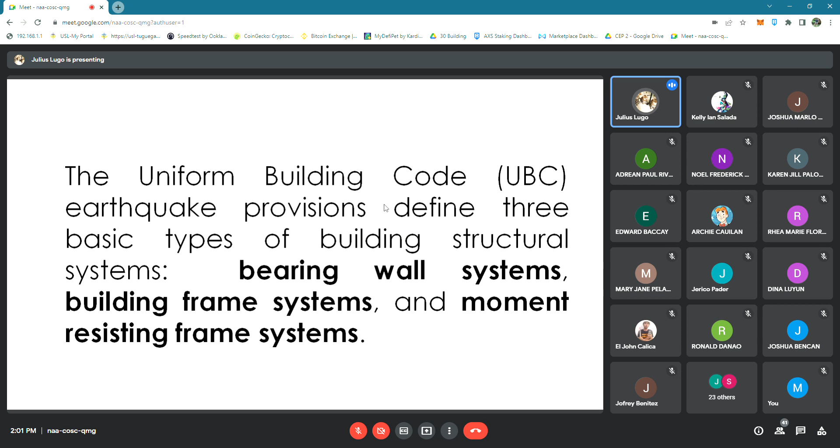Okay, so let's talk about the bearing wall system. What are bearing wall systems? Is Lexilin Margs here?

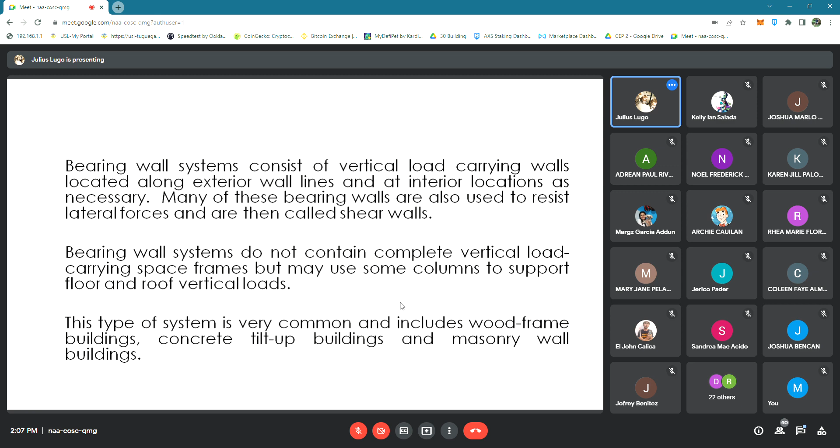Next, we have building frame systems. Please read, is Apostol MJ Sharaf here? Please read the first and second paragraph.

Building frame systems use a complete three-dimensional space frame to support vertical loads, but use either shear walls or braced frames to resist lateral forces. Examples of these include buildings with steel frames or concrete frames along the perimeter and at intervals throughout the interior supporting vertical loads from floors and roof.

Okay, so for the building frame system, the difference between this and the bearing wall system is that the building frame system is comprised of beams and columns with the incorporation of a shear wall. So anything made up of columns, beams, and a shear wall - those are your building frame systems.

Sir, why isn't the bearing wall included in the building frame system? Well, technically they can be combined, but then it's not called building frame system anymore - it's called dual system. Later I'll show you the differences in terms of the figure, but for now let's focus on this. So again, the building frame system comprises the columns, the beams, and the shear wall.

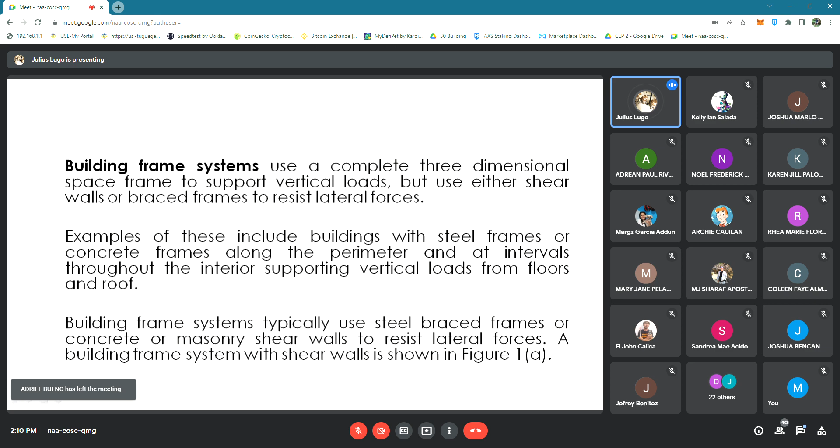So you'll ask me, sir, what's the difference between building frame system with shear walls and moment resisting frame system? Okay, let's proceed with the moment resisting frame. Arao, Mark Adrian - are you here? Would you mind reading the entire slide?

Moment resisting frame systems can be steel, concrete, or masonry construction. They provide a complete space frame throughout the building to carry vertical loads, and they use those same frame elements to resist lateral forces. Shear walls and brace frames are not used in the system, as shown in figure 1B.

So it's pretty much self-explanatory, the moment resisting frame. It's almost the same as the building frame system, only that we don't need shear walls anymore in a moment resisting frame. Why? Because the columns and beams themselves can withstand the lateral forces.

Typically, the problem with the building frame system is the connections at the nodes - the connections on the nodes aren't that strong. That's why it's not able to resist lateral forces caused by wind or earthquake.

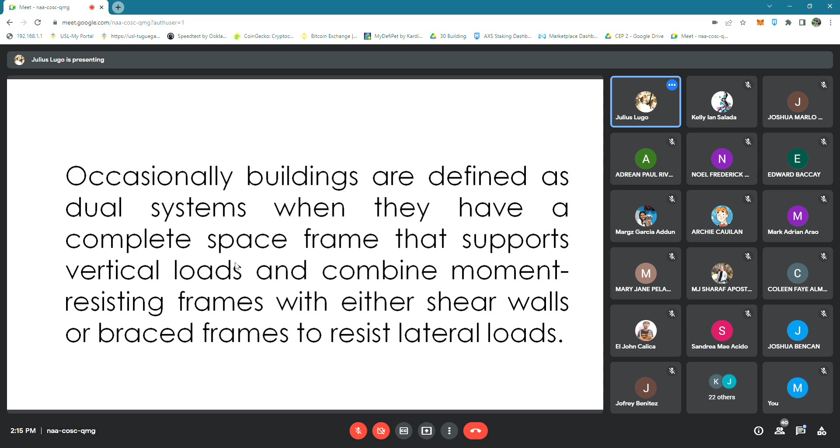Now, in order for you to know more, we will be moving on to the lateral force resisting elements. So itong lateral force resisting elements na to, this will just talk about the types of bracing, mga ganyan, sa ating tawag dito, building frame system. Okay, and it will also introduce to you the special moment resisting frame. So ano bang ginagawa nitong lateral force resisting elements na to?

Okay, Balisi? Hello? Sir, lateral force resisting elements. Sige sir, go, sabi pa sir.

Lateral force resisting elements must be provided in every structure to brace it against wind and seismic forces. The three principal types of resisting elements are shear walls, braced frames, and moment resisting frames. Shear walls can be made of sheathed wood frame walls, reinforced masonry, or reinforced concrete.

Okay, baka ma-confuse kayo, kanina we talked about the system. So parang medyo magkakalapit lang yung mga pangalan nila, no? Kasi in the lateral force resisting elements, we have shear walls, brace frames, and moment resisting frames. Baka sabihin niyo, sir, isn't this similar to the major classification under UBC, which is the bearing wall, the building frame, and the moment resisting frame? Hindi po. Okay, this talks about the components of those systems.

So the first one, particularly this is for the lateral force resisting only. So the first one is a shear wall. Okay, what's the difference again between the shear wall and the load-bearing wall?

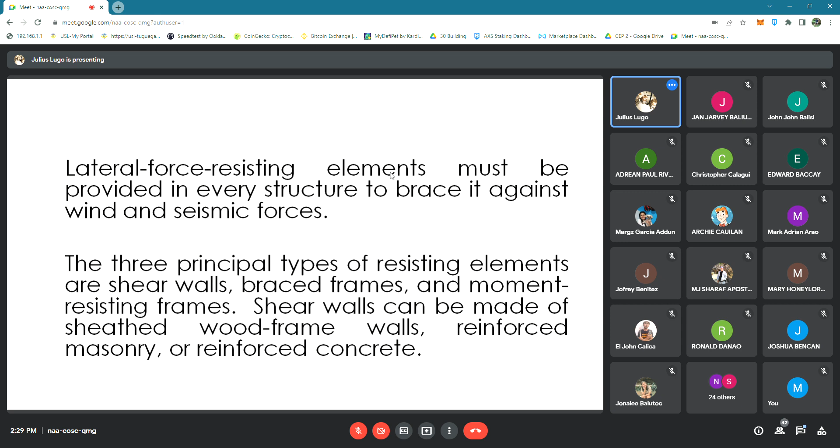So we have steel-braced frames.

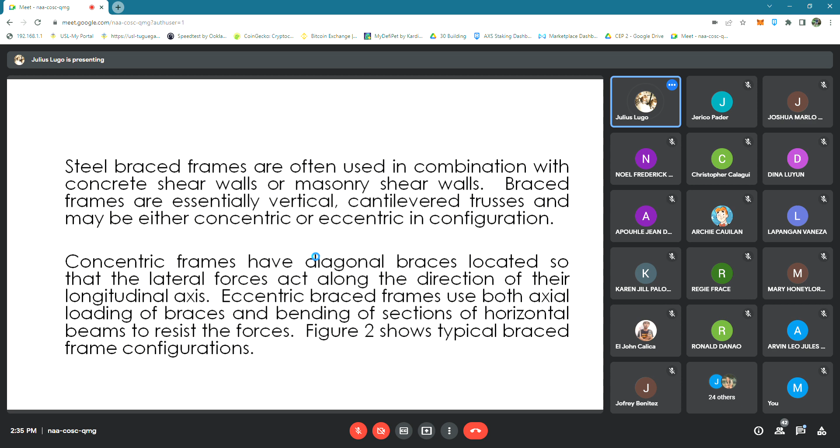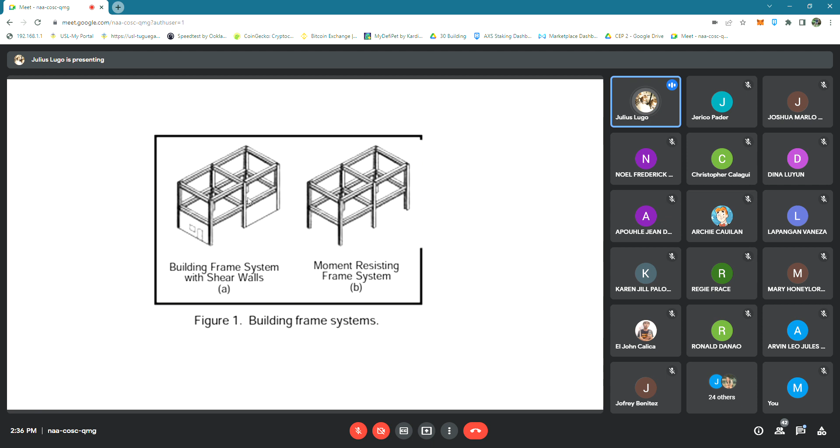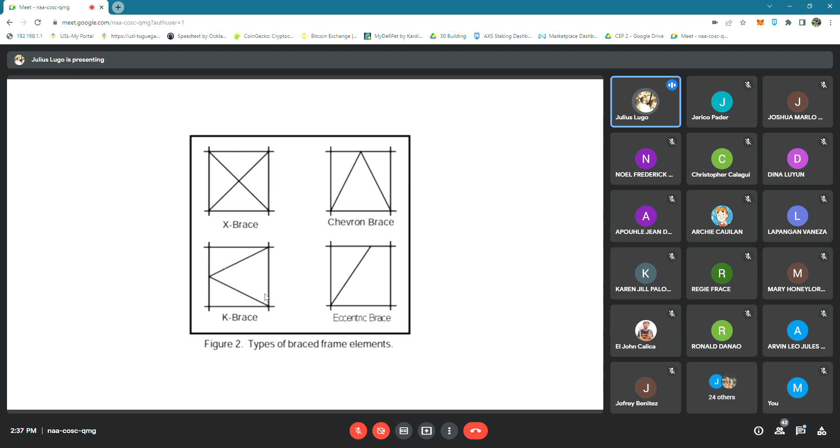If you said yes, very good, but actually it's a no - the ones who said no, excellent. Guys, when you say yes, it's wrong; it's not a yes, it's a no. Technically, you just put braces there because it's actually a building frame. Take note that our definition of moment resisting frame is that the columns and the beams alone can already withstand lateral forces - you don't need to brace them. The skeleton alone of the moment resisting frame is already enough to withstand lateral forces. Why would we add braces? Because the building frame system cannot withstand the lateral force on its own - that's why we put additional braces. So even if you add a shear wall or X-bracing, the building frame system will never be transformed into a moment-resisting frame. There's really a difference between the definition of moment-resisting frame and building frame. So these are the framings we saw earlier - eccentric braces, K-brace, chevron brace, and X-bracing. Moment-resisting frames can be constructed of steel, concrete, or masonry.

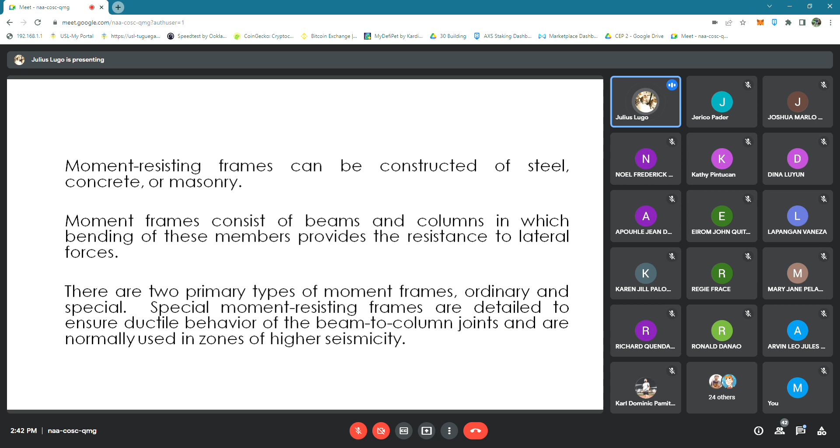Okay, anyway, out of context. Okay, next we have Rivera.

Because of damage observed following the 1994 Northridge earthquake, steel moment resisting frames have been under intensive study and testing. The goal is to determine the causes of the damage and to recommend changes in steel moment resisting frame design and construction to ensure ductile behavior of the joints.

Okay, so there was an instance before, way back in 1994 in Northridge, wherein there was a steel moment resisting frame. So technically, how do we connect steel members, a steel column to a steel beam? How do we connect it?

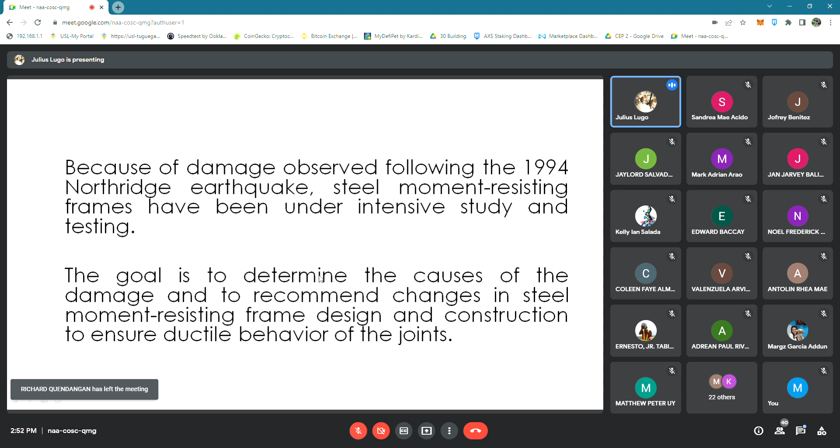So the selection of the type of lateral force resisting elements to use in a building is often based on economics. Syempre, in the school, I think in school we have a dual system, the ENG building, I think that's dual system, but I'm not really sure. Kasi yung ENG building noon, mag-isa lang niya yan, nung college ako, mag-isang building lang yung ENG building, ngayon kasi nadugtungan na siya. Ngayon, kung may pera ka, you can definitely opt for any type of a building or a lateral force resisting element, it depends on your budget.

Pero if you were to ask me, always opt for a moment resisting frame. Marami kasing advantages ang moment resisting frame compared to a building frame and a shear wall, mas madami. So a single type of resisting element is commonly used in most building types, such as in houses where wood frame shear walls are used, or in concrete tilt-up buildings where concrete shear walls are used. However, other types of building may need to use combinations of more than one type of a seismic element.

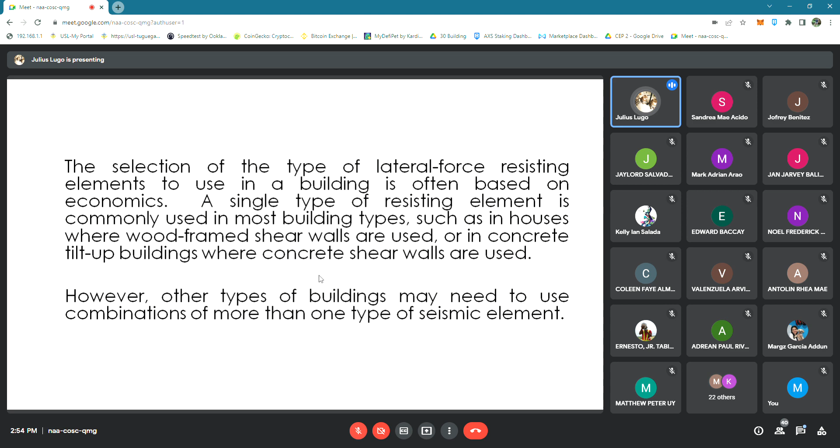Okay, so dito tayo papasok, dito na papasok yung dual systems na mga ganyan. The building code allows combinations to be used, but they are also subject to very specific structural design rules. Very strict tayo guys when it comes to combination of two or more seismic elements.

Why? Kasi in the code itself, in the UBC and in ASCE, ang mga binibigay lang dun na codes are actually for a special type lang ng framing system. For the combination, medyo magiging complicated na siya kasi you have to combine several sections of the code, in order to make this combi or this dual system functional. Okay, medyo mahirap yun.

Ngayon, if I were you, if you were to design, just focus on one type of a lateral resisting element. Kasi mahirap guys kung combinations na, mas maraming involved na sections sa code natin. Mas mahirap siyang i-apply and mas mahirap siyang ipatayo kung combi. Kung kaya naman ng moment resisting frame na lang, why would you opt to construct a dual system kung kaya naman niya, di ba?

Okay, so yun lang yun, yun sa mga disadvantages. And medyo matagal yung time and yung tawag dito, pag-procure ng material. Kapag isang type lang ng system, well, isang material lang yung kailangan mo.

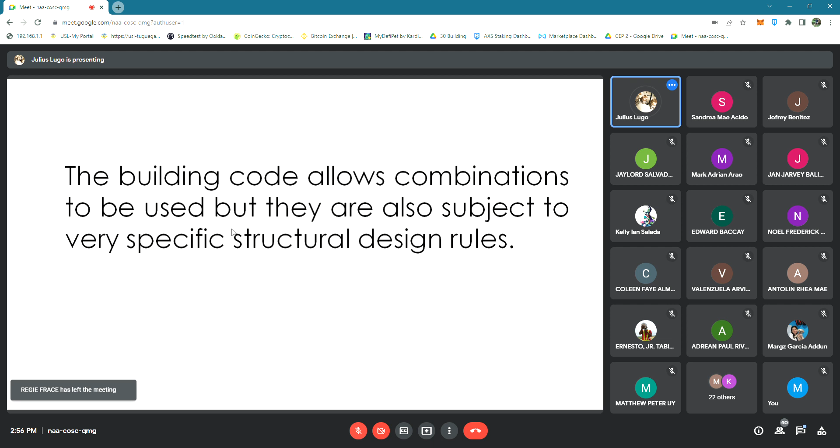Ganun yun. So for example, if concrete shear walls that are also bearing walls are combined with braced frame elements along one axis and ordinary moment resisting frames are used along the other axis, the braced frame elements need to be designed using slightly larger forces than if they were the only type of resisting element used along that axis. So ito, meron na nga tayong bearing wall, nilagyan pa siya ng braced frame, and then nilagyan mo pa siya ng moment resistant. So mamaya i-draw ko yan.

Okay, i-draw ko siya. Meron kasi guys yung mga brace frame na nga siya, tapos meron pa siyang shear wall. Tapos yung shear wall na yun, it's also a load-bearing wall, or gravity load-bearing wall. Dun pa lang, sobrang taba-tiba na yung design mo. So marami kang masyadong i-consider na factors, especially in doing or in following the building code or the structural code.

Now, take note that the code does not exempt you from any charges. Similar to your assessment 1 way back in prelim, the building code does not exempt you from any legal charges that may arise from the failure of the building. Kasi nga, even though you follow the code, nasa discretion mo pa rin yan.

Kung puro minimum naman yung ginamit mo, of course, hindi mo in-anticipate na magkakaroon tayo ng dynamic loading or there are changes in the characteristics or the occupancy of that building, well, magpa-fail at magpa-fail yun. If it did not meet the certain standard for this particular type of occupancy, mga ganyan, for the seismic load conditions, maximum seismic load conditions, mga ganyan.

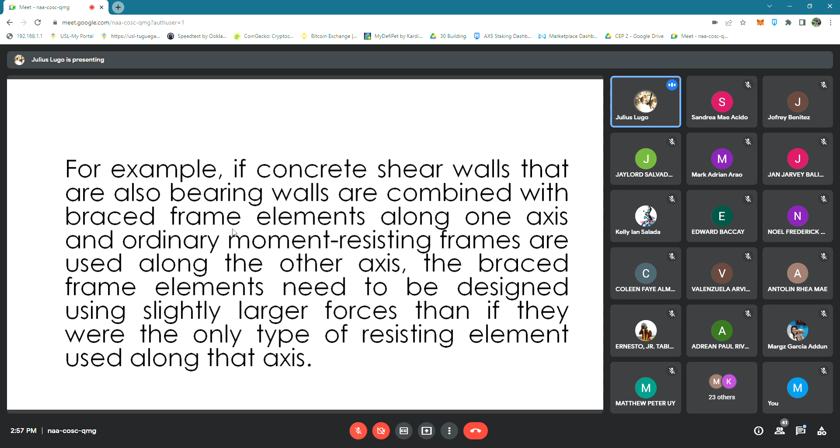Then on the other hand, on the other axis, the moment frame elements also need to be designed for force larger than if they were the only type of resisting element in the building. These adjustments in design forces are required to account for the differences in strength, stiffness, and ductility among the three types of resisting elements. Siyempre, the bearing wall, it's actually a wall.

Now, yung frame, structural frame natin is, kung building frame lang siya, it does not carry. Kumbaga guys, kapag nag-structural analysis kayo, for example theory of structures, di ba if you have two types of structure, determinate and non-determinate, tapos rigid and non-rigid. So yung indeterminate structures na yan, masyadong mahaba yung calculation.

Nagpa-finite element tayo. Do you have finite element na subject? Finite element, do you have finite element na subject in civil, your new curriculum? Meron ba, wala? Wala naman po, sir, wala sir. How about matrix analysis of structures?

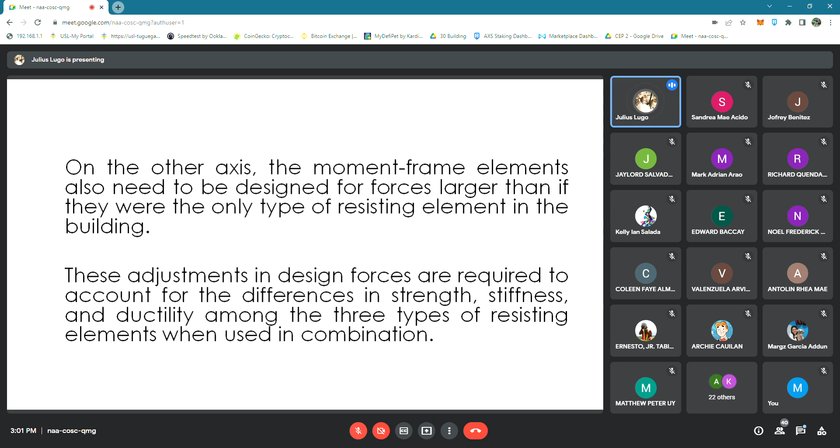Okay, so that's like the last part of the lecture. That ends the lecture for the system. Now I will be showing you some diagrams, so you can better understand what bearing walls are, things like that. Let's go to seismic analysis, I'll leave the bridge topic for now.

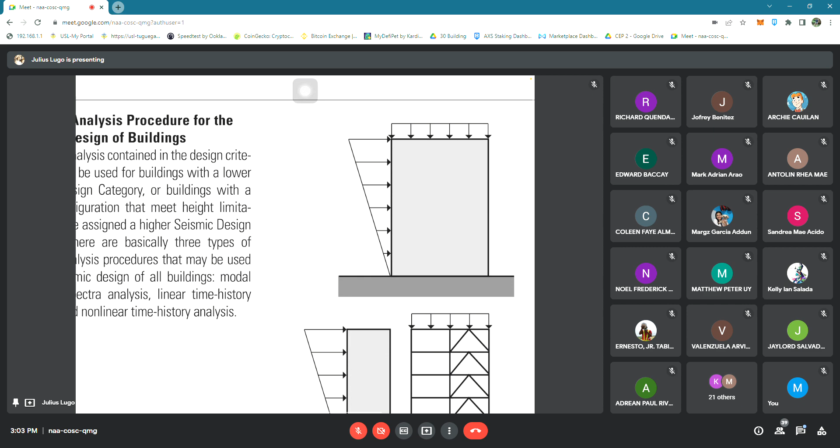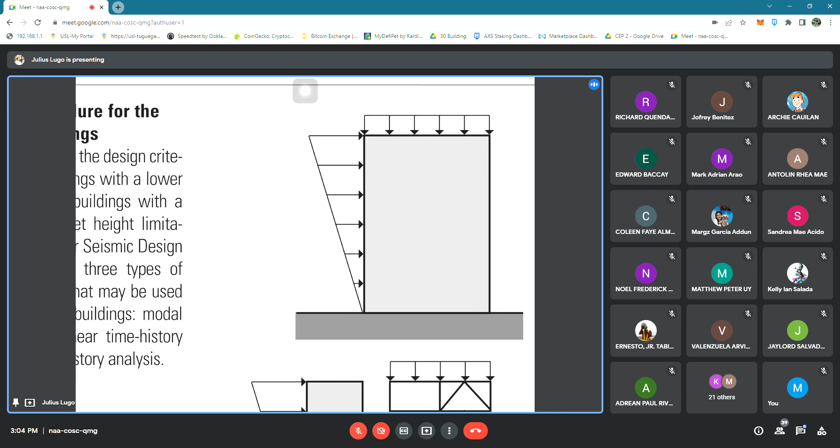So going back, guys, these are the figures of the systems. Let's start with this one. What do you think is this system? So we only have columns on the edges, and then a beam on top, and the shaded portion is your wall.

Hello? Hello? Can you hear me? Yes, sir. Hello? Very well. Hello, hello, hello from the other side. Yes, sir, can you guys hear me or not? Yes sir, yes sir. Wait, sir. Did you hear me? We can hear you, sir. Were you answering earlier? Turns out it was on mute. Okay, going back.

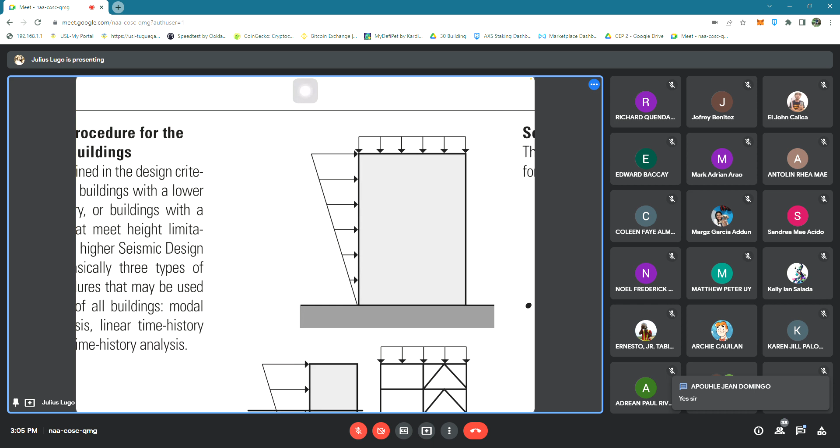Let's go back. We have here two columns at the edges of the building, and then we have a beam on top, and the shaded portion is the wall. What type of system is this?

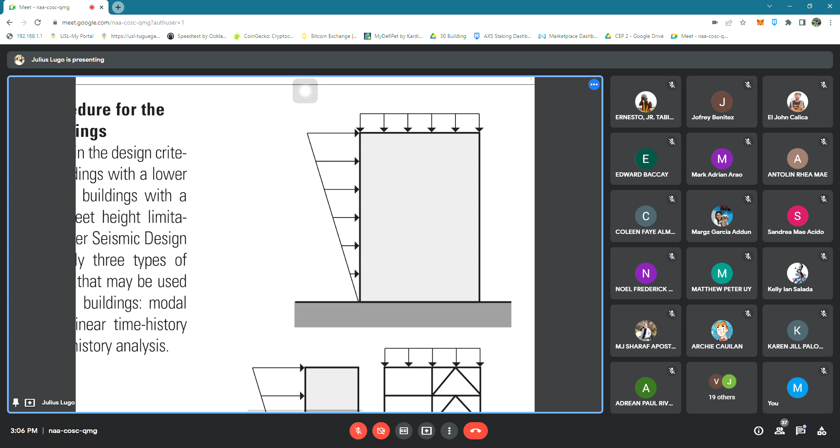Bearing wall, sir. Are you sure? Sure ka? Who answered earlier, who was that? Was it you, Calica? Hindi po sir. Who was it then? Uy, sino yun, sumagot na. Aaron, ikaw ba yun? Sino yung sumagot kanina, yun lang naman tinatanong ko. Ano ba yan, hirap naman kausap ng mga to. Si Apostol po ata, sir.

Apostol, ikaw ba yun? Yes, sir. Who answered earlier? So, you said earlier, this is a bearing wall system. Let's check if it is a bearing wall system. Why would you say it's a bearing wall system when it has a beam on top?

Apostol MJ, that's what I searched for, sir. Oh wow, you searched it, how did you even search for that? This figure, is that right? Yes sir, I searched for building frame systems and that's what came out.

Okay, well, very good, Apostol. This is actually a bearing wall system. I didn't say it has no column and beam. The bearing wall system does have both columns and beams. Only that, if it's a 3-story building, you wouldn't see beams in between stories, just like this one. So it still has beams and columns, only that the column is located on the ends, and the beam is located at the topmost, supporting the roof deck. And then the wall will be supporting all the floors. So there are no beams in between stories. Okay, so that is your bearing wall system.

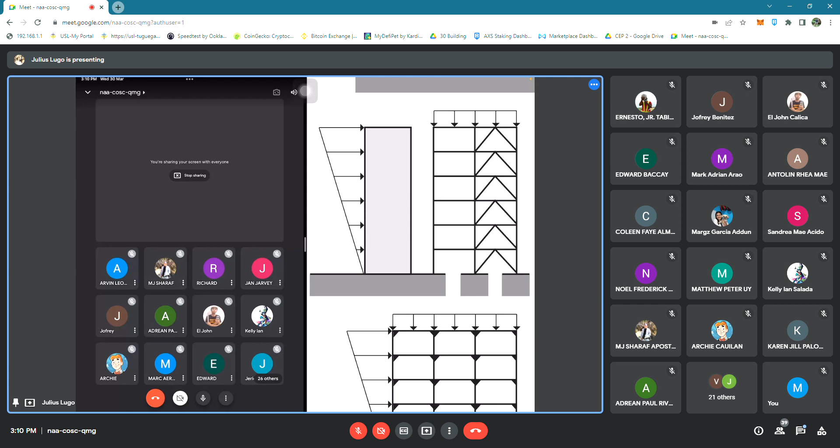How about this one? Dual system. Are you sure this is a dual system? Yes sir, dual. Okay, how about this one? Moment resisting. Okay, what do we mean when we say dual system? Okay so, this is dual system, this is moment resisting. How about this? What is this? Building frame. Building frame. Now, how about this one?

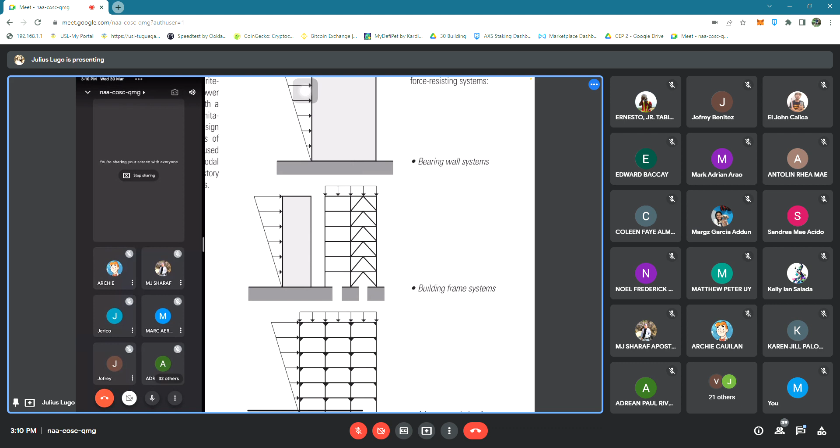So, first one is your bearing wall. No problem there. This one is actually a building frame system. Okay, that is a building frame system.

So in here, even in this second figure, we actually have a braced frame. What type of framing is this? What type of bracing is this? Chevron, sir. Chevron. Okay.

Are you sure this is chevron? Okay, so this is actually a chevron bracing, guys. So when you have a particular structure that is braced, that is already part of the building frame system. Take note that our building frame system is partly made of shear wall and then it also has a frame.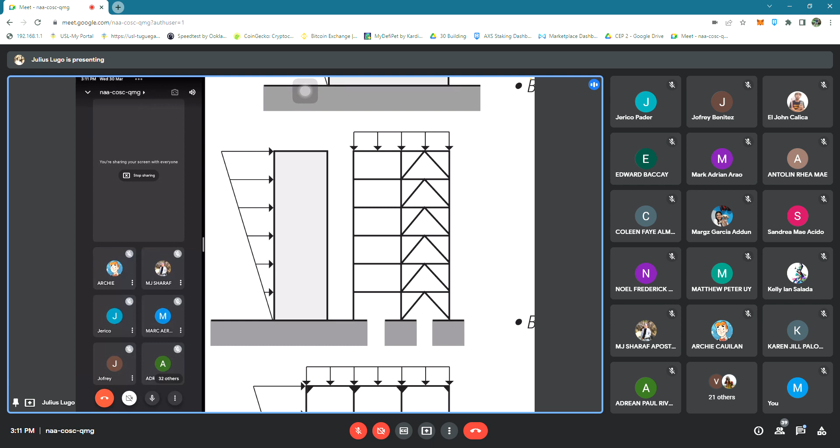So this one is your moment resisting frame. This is what I was saying earlier - in a moment resisting frame, especially a steel moment resisting frame, it doesn't need to be a welded connection. It can also be a bolted or riveted connection as long as we have some support on the nodes of the frame itself. This support will actually counteract the effect of the moment - the overturning moment and also the torsion.

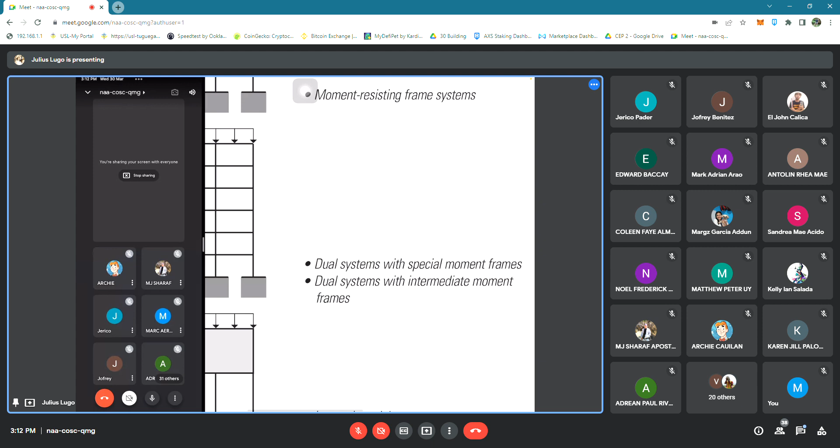So that is your building frame or your moment resisting frame. Now, this one - this is what we now call a dual system. Dual systems with special moment frames, and dual systems with intermediate moment frames.

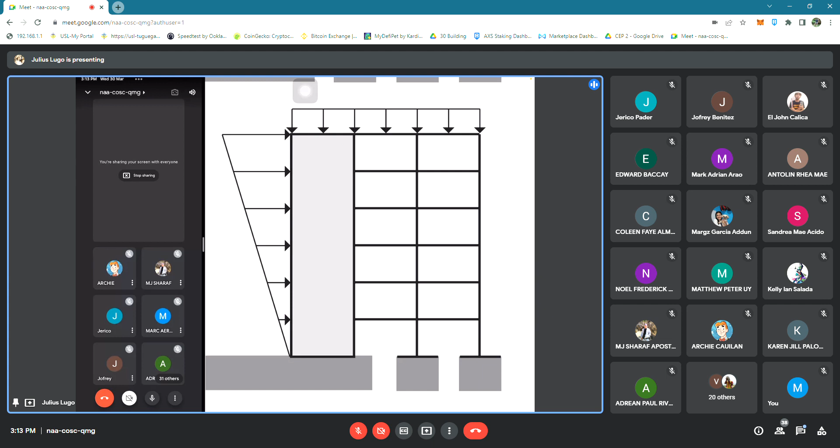So the difference is that in your building frame system, the walls there are shear walls - you are incorporating shear wall on the frame. Now in here, the shear wall is also a load bearing wall. So the wall here is able to resist the gravity loads and the shear or the lateral loads. So that is your dual system.

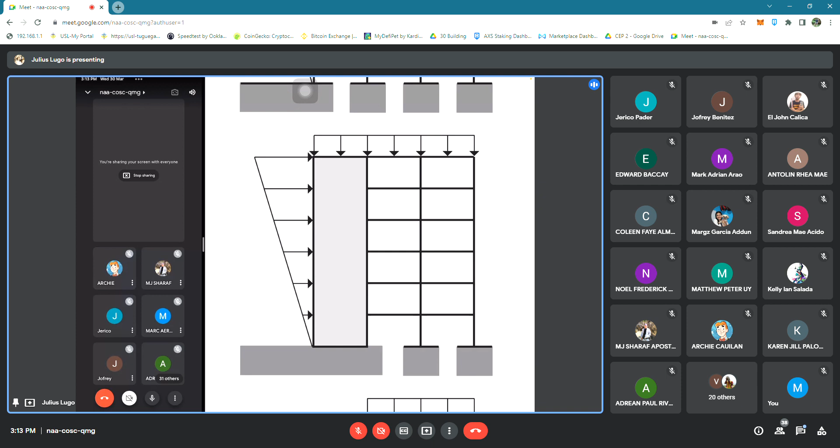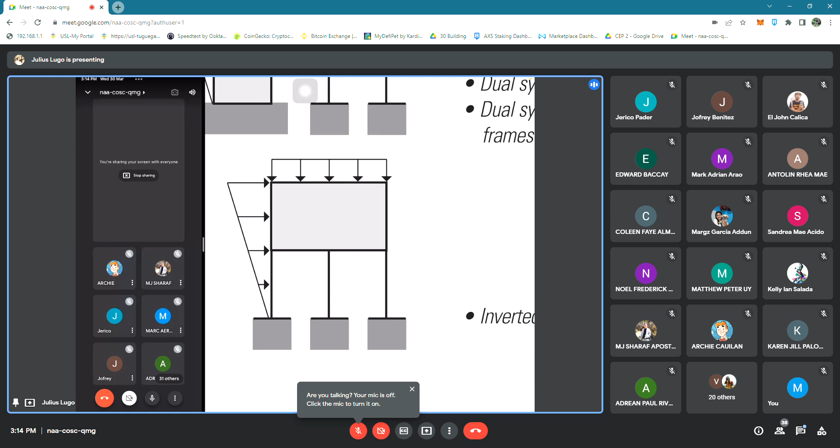Well, this one in the last part is the inverted pendulum system. They just call it inverted pendulum system, but it's actually a dual system - it's still a dual system. But we barely use the inverted pendulum system because who would want the support of the second floor to actually be a masonry or a shear wall? So, these are the classifications of your seismic force resisting system.

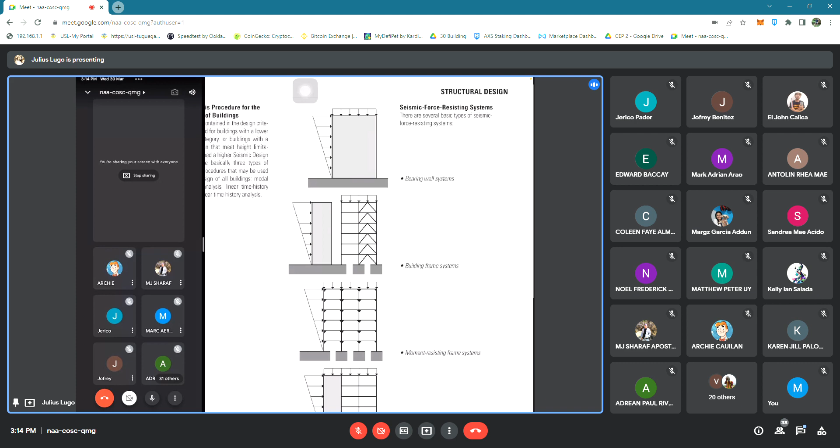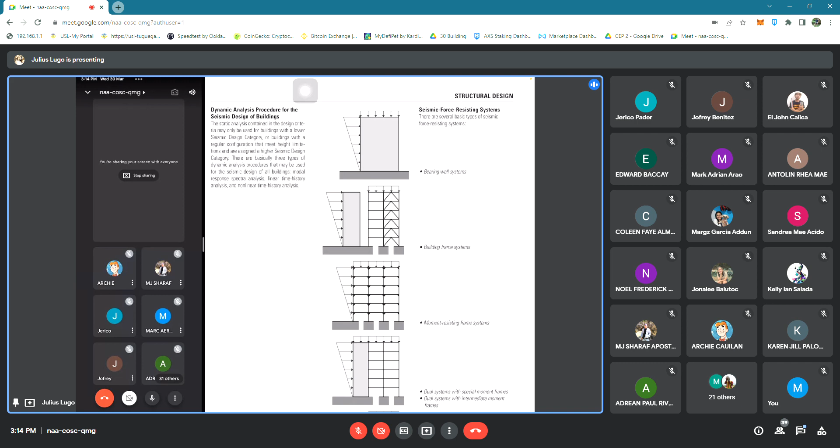And this is under seismic loading, which will be discussed in the finals. We'll leave it for last since it's a bit complicated - detailing of reinforcement and our earthquake loading will be discussed on the last part of our semester.

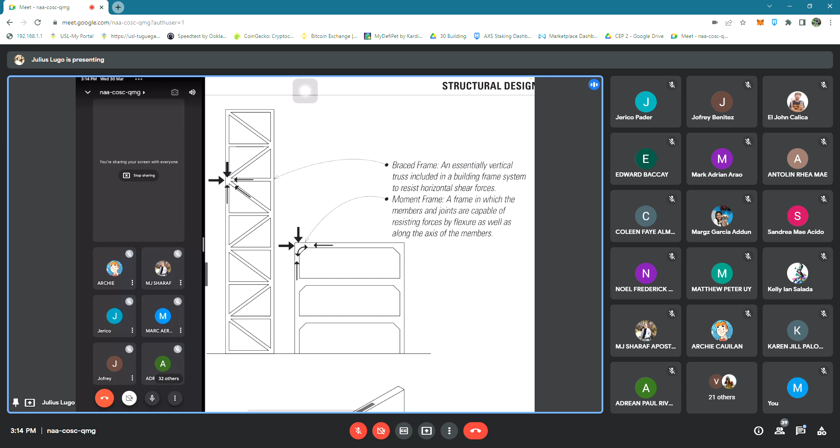And then I also have here - ah, here it is. So we have braced framing. No problem with braced framing - the first figure on the left is the braced framing, so we have no moment there. Now the next one here, this is actually your moment frame - so on the joints or on the nodes, we have support for bending or flexure.

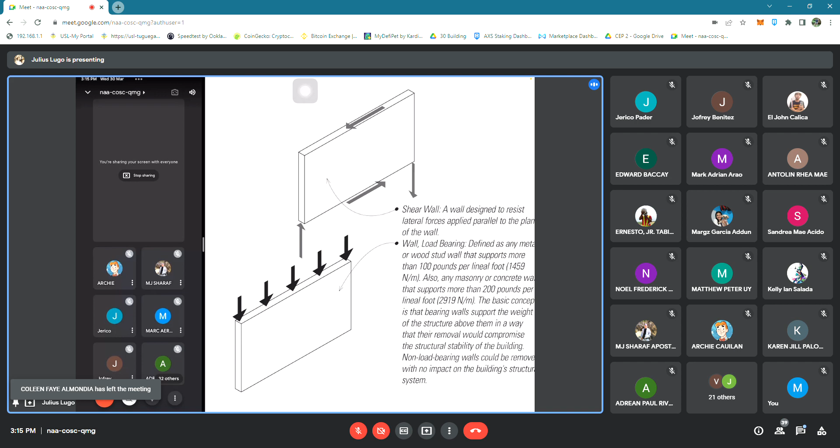Now let's go back to shear wall and wall bearing. Wall is load bearing. Our shear wall just withstands the effect of horizontal forces - the forces that actually cause shear on the structure. While our load bearing wall just carries gravity loads - the load is just acted on one side of the wall itself, and it is transferred into the column and the beam itself.

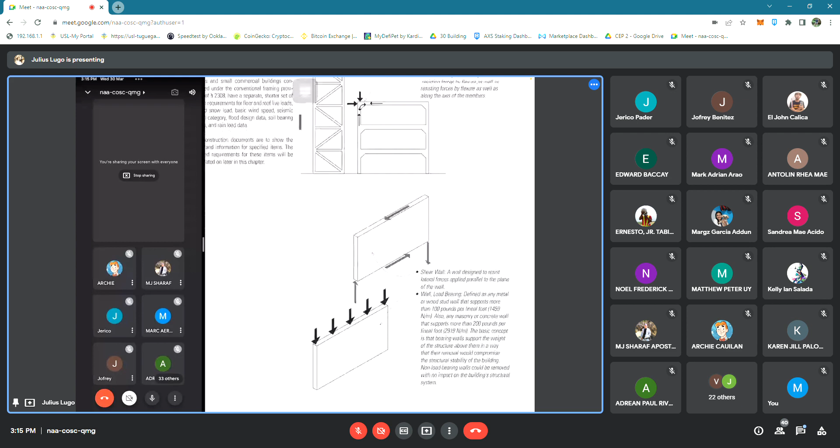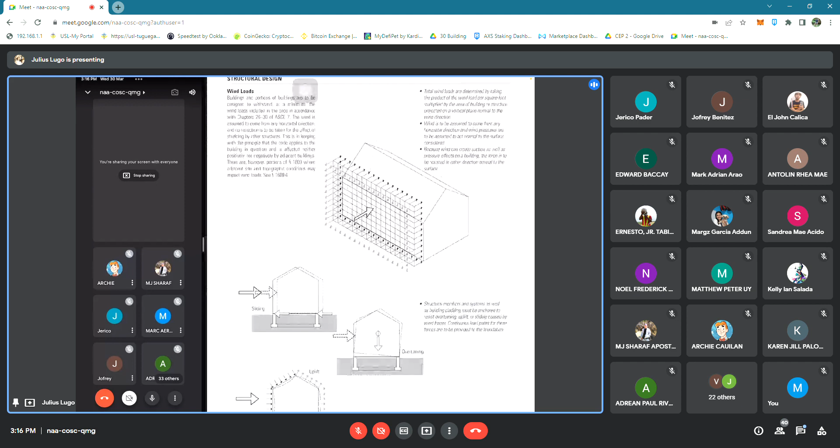So we also have the wind loads in here - this is how the wind loads act, horizontal, like that. So that's it, guys. I just showed you the types of systems we have as an introduction to your earthquake loading later on.

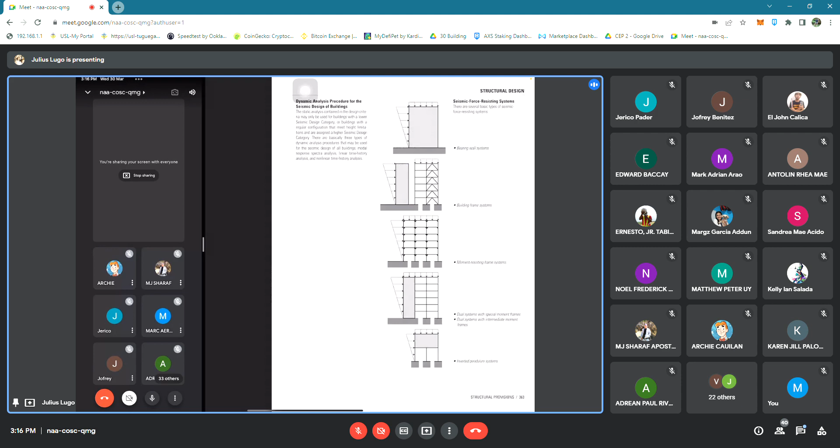Have you calculated earthquake loadings already? Don't you have earthquake engineering? Did you calculate already? Did you try to calculate earthquake loading already? Yes or no?

Yes. Was the calculation of your earthquake loading easy? Do you think it's difficult? It's difficult.

So again, how we will be following - I'm not sure which provisions we'll follow for earthquake loading, whether ASCE or NSCP, but they're almost the same anyway. The only difference is the geographic location. So that is our lecture for today. We still have like almost an hour and a half.